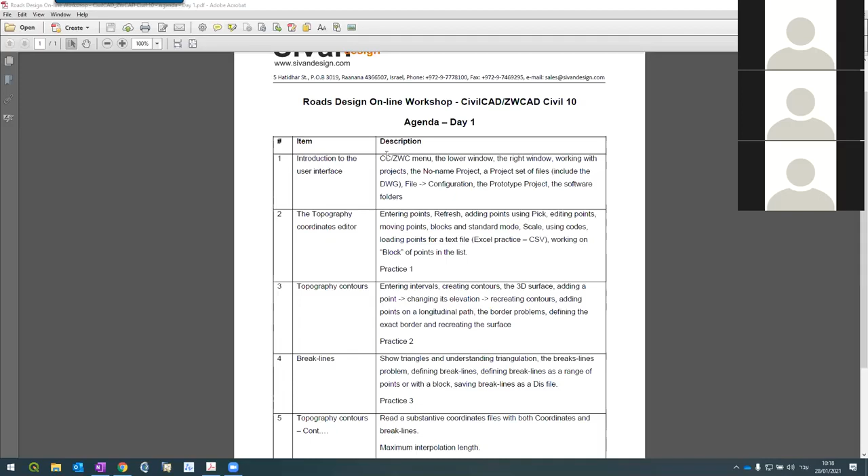We'll go to the topography coordinates editor - how do we enter coordinates, how do we load the coordinates, how we pick coordinates from the drawing and put them in the list, and vice versa. We'll go over how to use codes. I will explain later how to read from a text file, or in our case a CSV file, which is actually a text file from Excel. And then we'll see how to manipulate a list of points together as a block.

We'll go to topography contours. We create contours, we understand the concept of 3D surfaces. We'll add points, change elevation, recreate contours. Then we'll do a small study that will show you what we call the border problem and how to overcome it, how to define the border.

We'll end up this training with something we call filtering. Filtering is a method where you don't have a text file, you don't have data, you don't have breaklines, but maybe you have a DWG, a drawing file, and now you can extract the data from the DWG, convert your 3D surface, and continue working.

I hope I'm not too fast. I hope all of you can hear me. Just as a quick feedback, let's start with Gal. Gal, am I too fast or is it okay? It's okay.

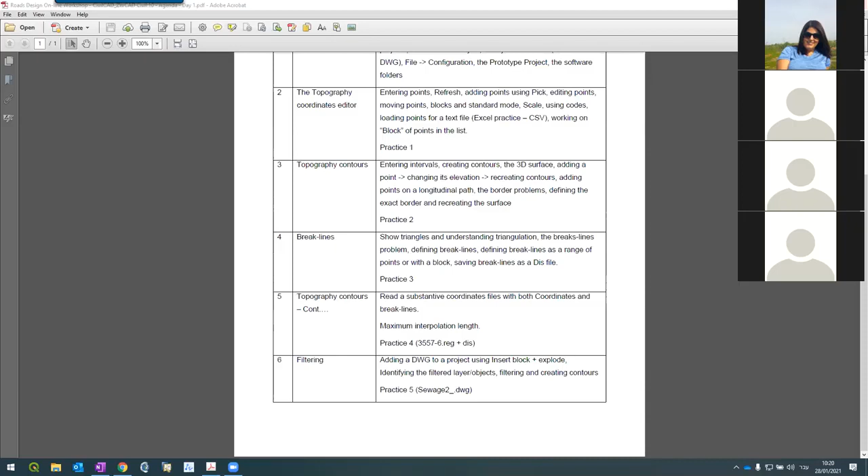Okay, let's not waste time and go into the system. The training is built up in a way where I do the introduction or demonstration on the software. Then, after doing that, I'll give you a practice to try it on your own.

So let me start. I'm starting the system. It launches, and immediately when it launches, it starts the drawing environment. I'm using ZWCAD.

What is ZWCAD? Well, I'm not here to sell ZWCAD, but ZWCAD is actually AutoCAD, a Chinese AutoCAD. So I'm using a Chinese AutoCAD named ZWCAD. In my opinion, it's equal or sometimes even better than AutoCAD. And believe me, I'm 20 years in this business.

But if you like, you can still use AutoCAD if you prefer. In my opinion, ZWCAD is faster and works exactly the same. So this is the advantage.

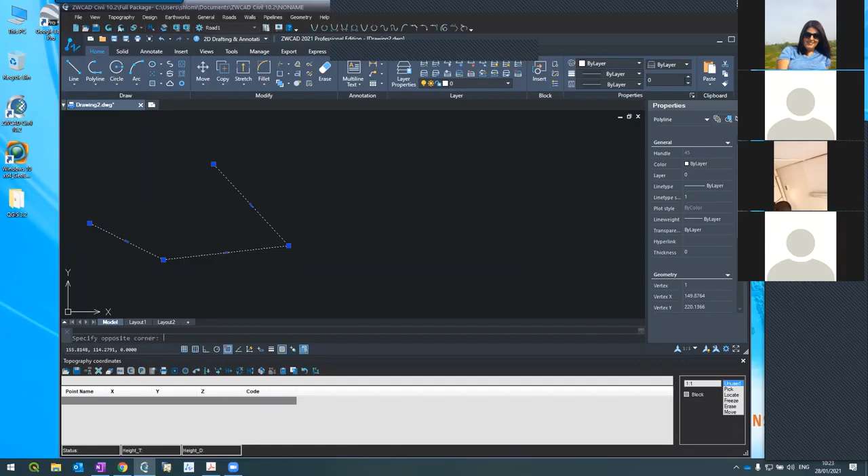You'll see the properties here. If you want to change color or layers, all the commands that you know from AutoCAD are here. All the buttons that you know, stretch, everything is here. All the menus, the ribbons - it's AutoCAD. It's actually AutoCAD. It's faster and most cost effective.

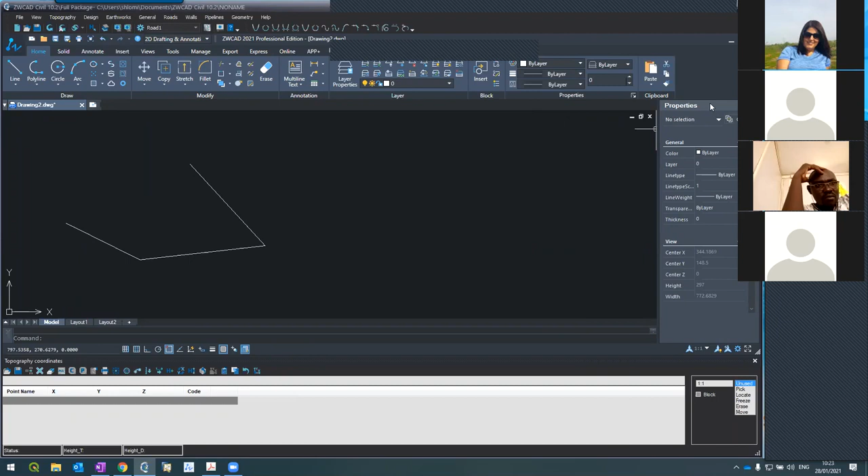So I'm introducing with ZWCAD, but you can work with AutoCAD. For me it's the same, whatever works for you. But I encourage you to work with ZWCAD.

Let me continue. This is the drawing environment. What we see here is on the top. I hope you can follow my arrow. On the top, we have the menu of ZWCAD Civil, which is actually CivilCAD. CivilCAD is ZWCAD Civil, it's the same product.

You see the menu of CivilCAD or ZWCAD Civil. Below, you see the toolbars of the CivilCAD or ZWCAD Civil. We'll learn about them.

And here is your standard ACAD, ZWCAD, AutoCAD - it's the standard. Here below, we have what we call the coordinates editor. It's an editor, I can type in things here. We will deal a lot today with this editor, but we'll talk about it in a minute.

So this is just an introduction. Very, very important - I'm working now on a project named No Name. You can see it on the caption on the top, it says the full path and it says No Name.

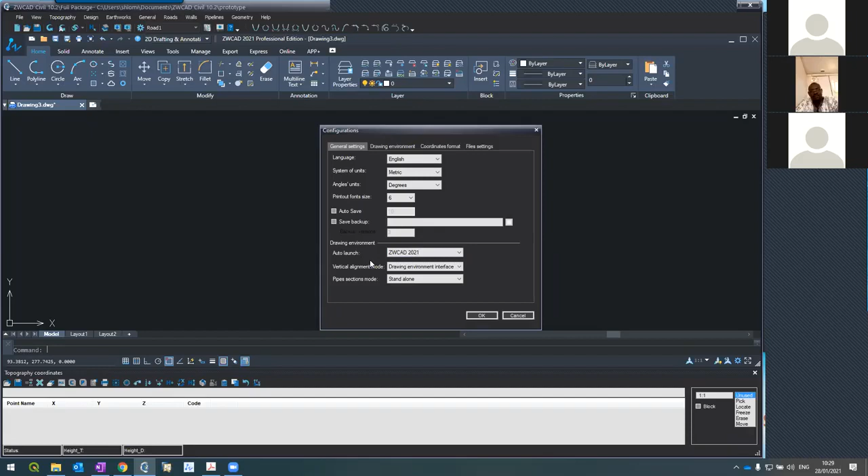If I go to file, configuration, file configuration, I can see how to set up certain configurations. For example, which drawing environment do I use - AutoCAD or ZWCAD. I'm using it here, I'm selecting. If I have several versions, I can use it here. I can go to drawing environment, set my default scale for the text. As you know, if you want to print at the scale of 1 to 250, you use one type of text size, and if you are printing at 1 to 500, for example, you use a different text height. So here is where you set it, the global scale.

Once you set it up in prototype, every new project will inherit these settings, but it will not affect past work that you have done - only new projects. So again, prototype affects new projects, which take their settings from prototype.

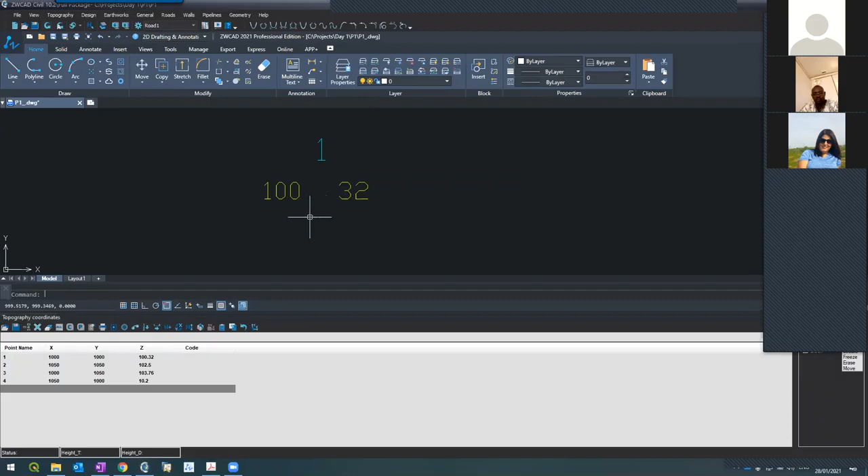Let's see what is the point. It's a block. Let me see - if I do a list, you see it's a block, inserted in a layer named civil.

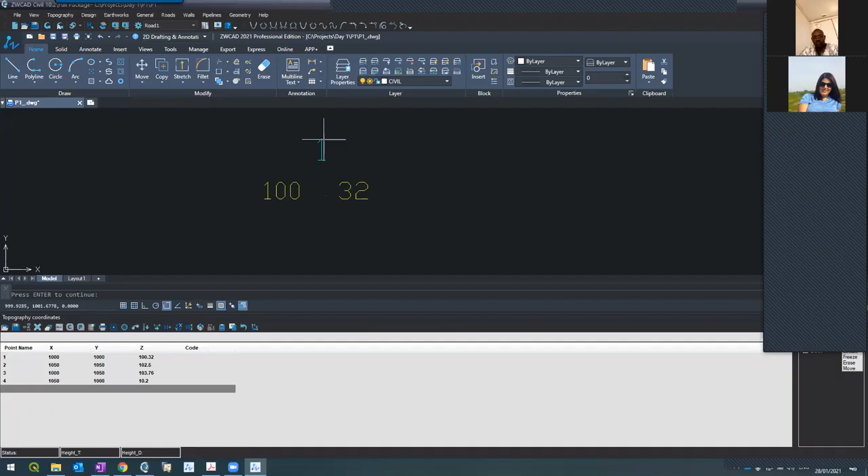The insertion point of the block is 1000, 1000 on elevation 100.32. So actually it's a 3D block where its insertion point is in the coordinate. Actually the insertion point is where the decimal point is, so it's this small one here. And the same goes here, and here, and points 3 and 2.

Fine, nice. How do I increase the size of the block? I don't know if you remember what we said, that our project should work with a scale of 1 to 250. So the software took 250 and created the block size with its attribute ready for 250.

But if I go here in the topography coordinates and press this button, option we call it, I see the options window where I can change and manipulate these things. Now I'm working on topography on the coordinates because I have many things there. On my coordinates, I want that my text will be adequate for a scale of not 250, but 500, and I would print.

Press OK and refresh again. You saw what happened? Immediately the size changed. Let me do it again.

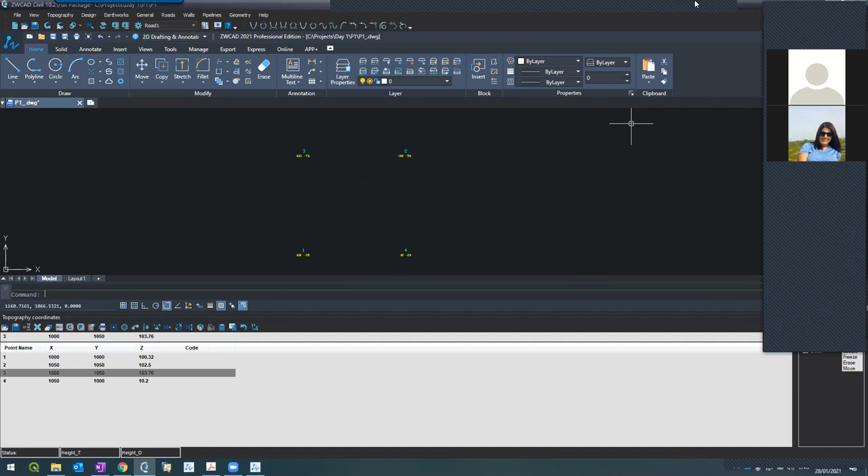What I will do now - you remember I entered coordinates here, pressed refresh, and it showed on the window. Now I'll do a different thing: I will use the pick here. See, I'm going down.

Everything below here in this window relates to topography coordinates. So if I go here to the pick and press here, see what happened in the command line - it says pick point, and gives it a number, 1005. I want to call it point number 100. So I'm entering 100 in the command line, and it changed to pick point 100. I'm going to the drawing.

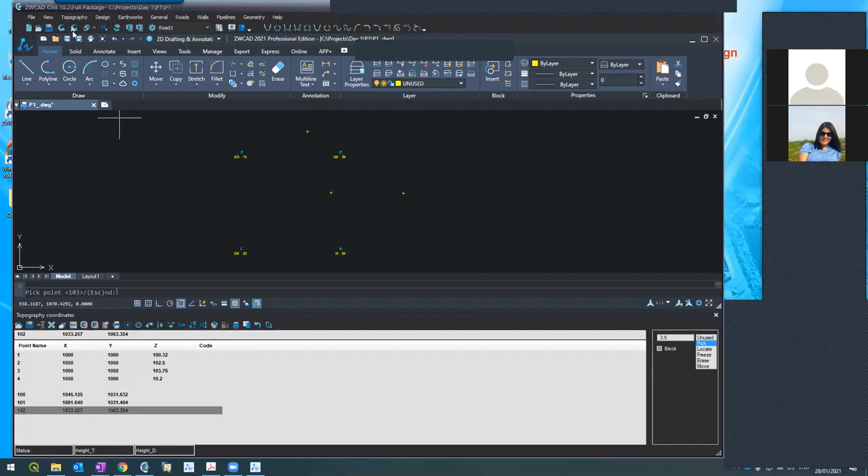And pick the point here. See what happened? It created the coordinates, giving it 100 and the coordinates. I'm putting one here and another one here. I'm pressing refresh. Here they are, the points, of course at zero elevation because we didn't give anything.

So again, pressing the pick here, it says in the command line, pick the next point. I'm clicking somewhere, it shows here. If I refresh, I'll see it completely.

I want to change the elevation of 103. I pick it here in the list, come to it in the editor, change it to 104, and press refresh. Here it is, 104. And so on, so forth.

Okay, so we saw how to do pick. We saw that there's a complete interaction between what's going on and the drawing.

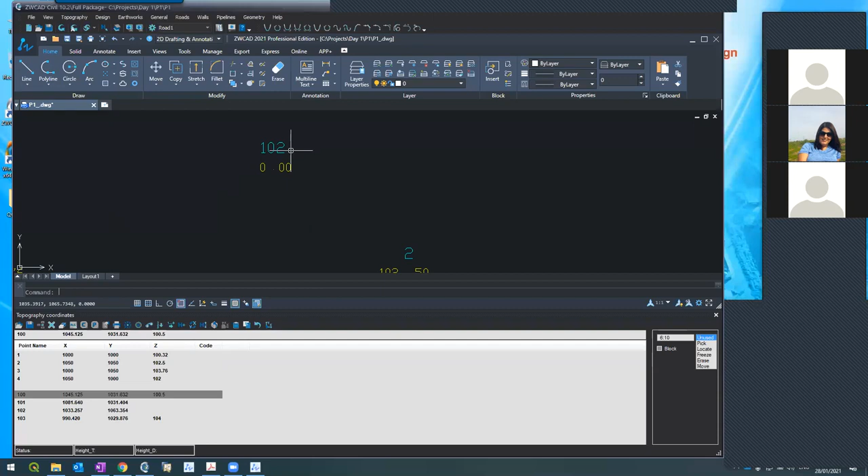But I can also add something else. For example, let's say that point number 3, when I pick it in the field, I've noticed that it's a tree. And in my GPS or total station, I collected it as point number - as a tree. I'm going to point number 3. You see the last column, it says code. I'm entering 60, pressing refresh.

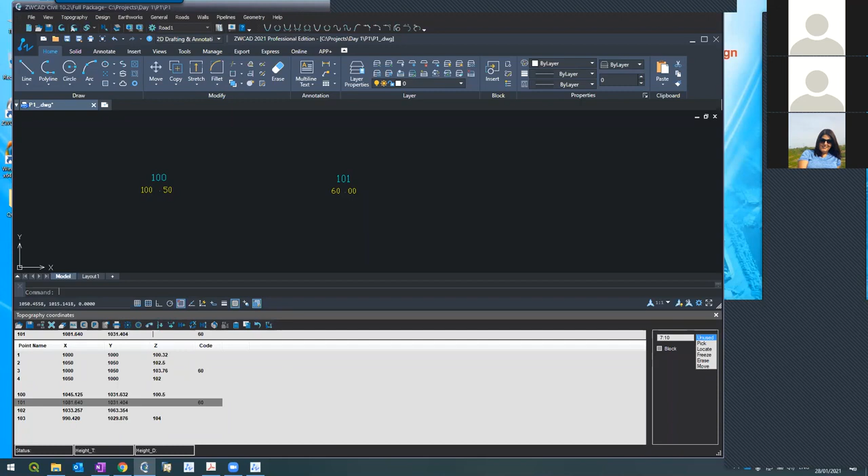And it becomes a tree. See? I entered 60 here, and it became a tree. Let's do the same for 101. I know that 101 is a tree as well. 60. Sorry, 60 is it. I need to give it a height. We did 0 and 60. Here it is, it's a tree.

I hope you got it. So how do I know these codes? How do I know these codes?

If I go to where my data is stored in documents, ZWCAD Civil, you'll see that there is a codes folder. And if I go to main DWG and open it with AutoCAD or ZWCAD, it's not so important. I started a new ZWCAD. Sorry, not this one, I made a mistake. If I go to main symbols, you see?

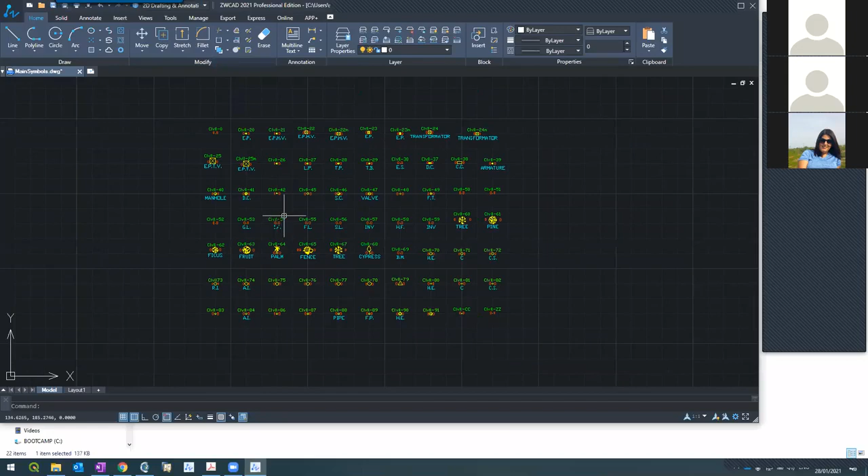Here we are, all these are my codes. So once I will 60, where was 60? Here it is, tree. I have pine, I have invert level. I have for valve, for example 47 is a valve.

Let's try it in my ZWCAD Civil, 47. I will take this point, 103, give it 47 in the code. All right, you see, it's a valve.

So here it is, these are the points, these are the codes. I hope you got it.

And what I'm going to do now is creating a file in CSV, load it in the system, and continue from there.

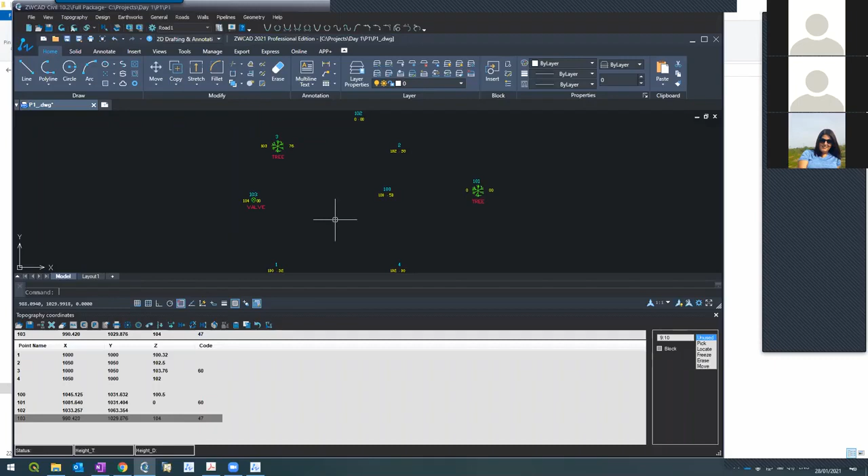So what I'm going to do now with all of you, I'm going to share with you a file which I prepared for this specific training. This one, this is the file. So this is the file, and what I want you to do is to, all of you, look at the file and practice it. So I'm putting it here. Here it is. Take now 10 minutes and practice the file.

Marina, do you remember how to, I don't know, even if it's possible, how to share with them? Can I share with them the file? Can I send it to them? Is it like Skype? Does it allow to... not sure. Share a file? Send them a file.

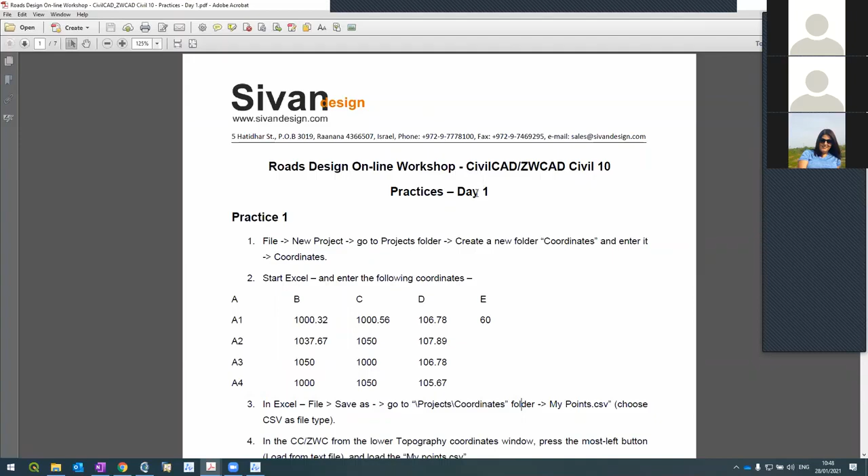I'm not sure, let me check just a second. You can attach it to the chat, Shlomi. I can attach it to the chat. Yes, yeah, okay, now you have the file. Thank you, now you have the file. You can download it to yourself. And I'm asking all of you to take 10 minutes and practice day number 1. Take your time, follow the instructions. If you have any questions, I'm here, just let me know. Take your time. Please, all of you, take the file, open it on your computer, open your system, and do it.

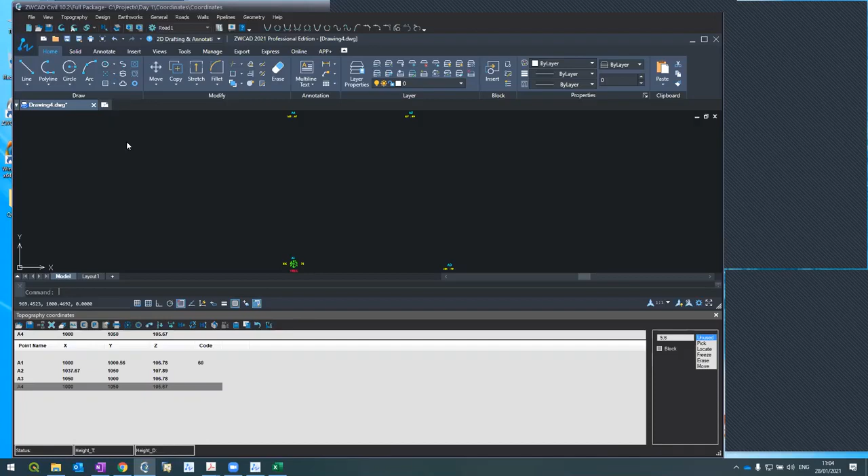Okay, I want to continue. So we created the points, we saw how to create, how to read from a CSV file, and we read it inside and saw it here. What I'm gonna do now, I'm gonna continue to topography contours. So all of you, please.

I'm going here, topography, contours. And on the right, I can see a new window, the topography contours window. I'm going to intervals and I key in 0.25, which is the vertical interval, and I press apply. Here it is.

With 4 points, the system creates contour lines between my 4 points. Moreover, the system creates a 3D surface between these 4 points.

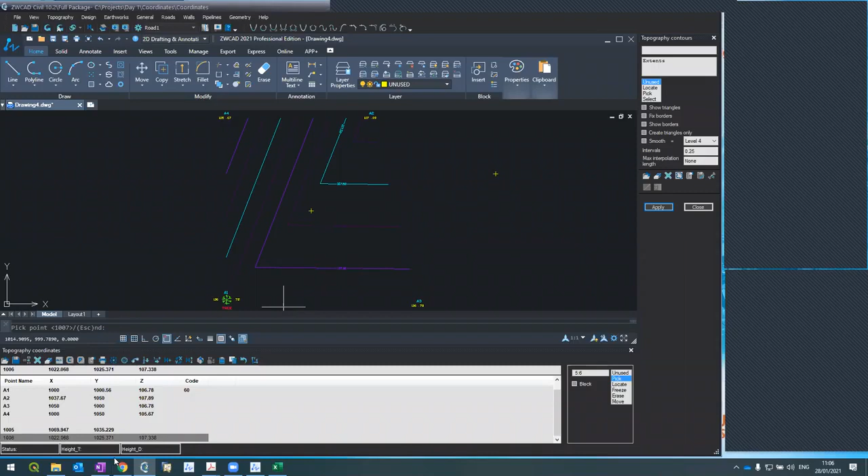That means that if I take my pick, which I used before - you remember when I picked a point outside of the surface, it gives me x, y. But if I now go inside the surface and pick anywhere, even here, automatically I'll get the z as well. See, x, y, z. You can try it. When I press refresh, here it is, 1006. Excellent.

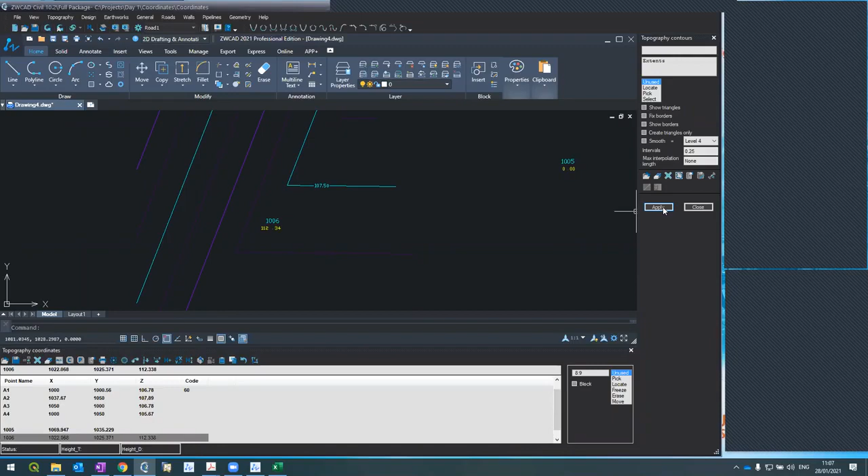If I take now 1006 and change its elevation, instead of what was existing, I will change it to 112. Press refresh and apply on the right side again. The contour line will change accordingly. I hope you succeeded to follow.

Again, I went to this point and changed its elevation. This is 1006, you see it here? And change its elevation to be 110.55. I'll refresh first, and then I apply again. You see, it's changed accordingly. And moreover, the surface changed accordingly. I hope you got it.

Any question to what I just did? Anyone, question? You can speak up, you can write. If not, I will continue.

Excuse me, Shlomi, just one question - how do you make the surface? How do you connect all this surface you make? Topography, contours - there's a window on the right. I entered the interval, 0.25 in my case. Press apply, that's it.

How do you put this window on the right hand side, the contours? The window on the right side. How do you open it, the contours? Topography, contours, in the main menu, you'll get the window on the right. You enter 0.25 or whatever you like, you press apply, and automatically you get the surface.

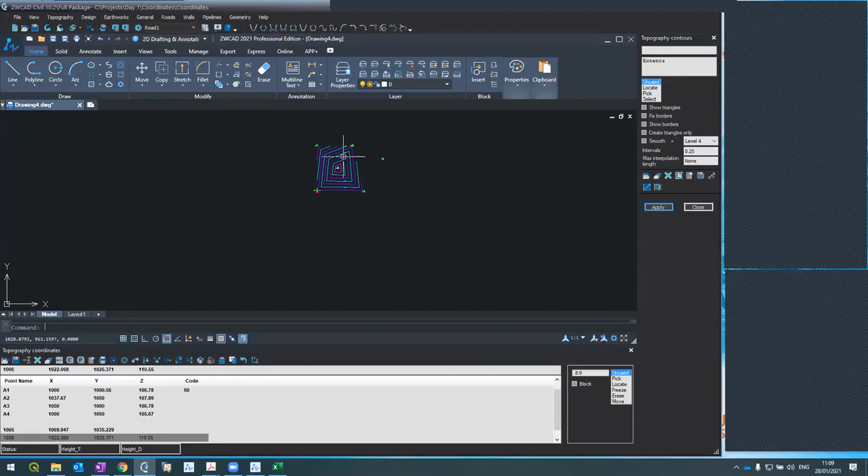Questions? Anything? Anyone? No questions. That's good. Now what I'll do, I'll create points here. How do I do it?

I'm using the pick. Let's assume that from here, from this surface, there is a small path going this way, and I'm having points along the way. The first point is here, the next one is here, and the next one here - this is one section. Next section is 1, 2, 3. Next section is 1, 2, 3. Next section is 1, 2, 3. And now refresh. These are my points. Good. I measured in sections.

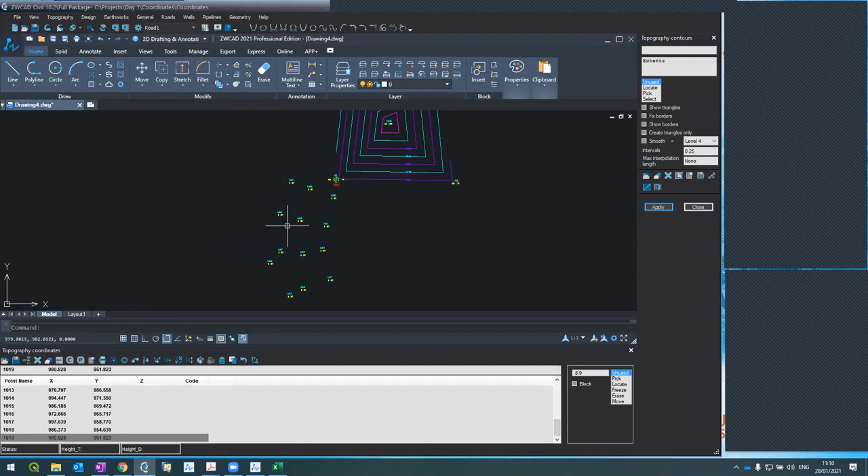Let's enter some elevations along. So for 1008, I want to find this one. How do I quickly find it in the list? I'm using locate here on the right side - locate, go to the drawing, pick the point. Automatically, the software highlights it in the list. And now I can enter the elevation. 1008 will be 107, 1009 will be 107.3, and 1010 will be 107 as well.

Let's continue. 1011 will be 107.3, and this one will be... sorry, I'll put it in - yeah, 107.3, and this will be 107.6, and this will be 107.3 as well.

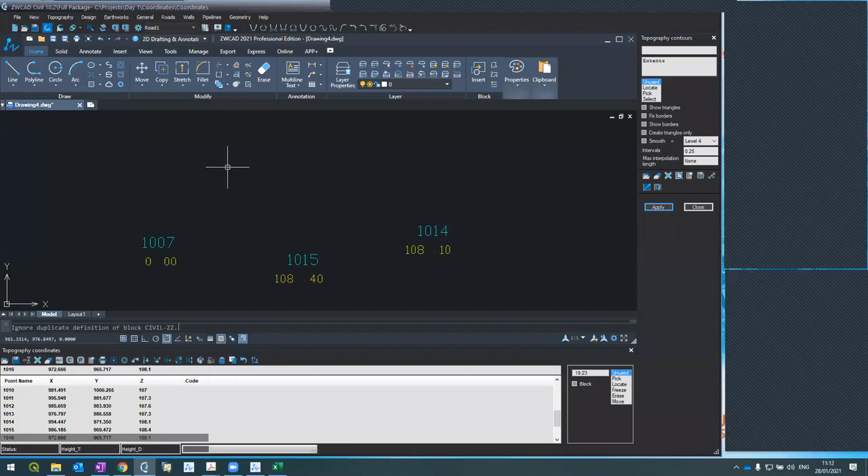And the last one, this one, I want to delete 1007. Let me look for it. Where is it? In the list, here it is. I'm clicking the eraser here, and refresh. It was removed. Let's continue.

To 17. It will be 109.5, 109.7, and 109.5 again. I'm refreshing.

Here are my points. I'm going to topography contours. On the window on the right, I press apply again, and then I have my contours.

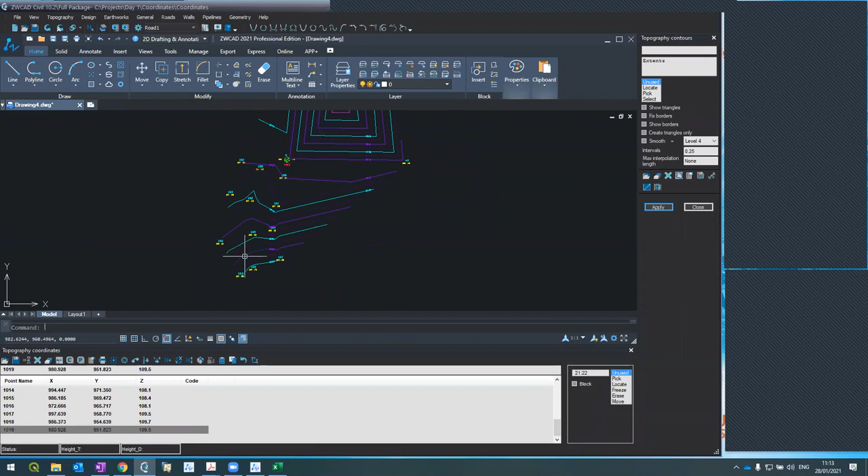See what happened: the contours were created, but the system didn't know that we don't want to create contours here. We didn't know that this is a path. It's actually supposed to stop here, but the system also created contours here. What do we do? How do we avoid it?

I will show you several ways. The first one will be to use the border.

In this topography contours window on the right, I'm clicking locate, and start marking my border. I'm starting from here, here, here. Every time I pick a point, it appears here on the right, and the system highlights it in the list.

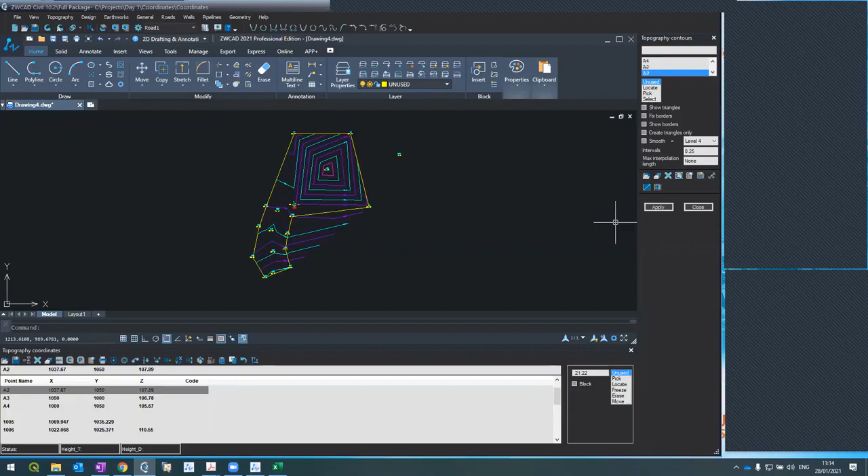When I want to finish, I press C in my command line for close, and enter. Then apply, and the system limits my contours into my polygon.

What I'm asking you to do now is the same practice that I did. You can do it in the document which I shared with you, named Practice 2. You can also look at the elevation which I entered here, so you know which elevation to enter and have reasonable data. It's not so important, but still.

Take 10 minutes, exactly 10 minutes, so we'll pick up with more information today. At this point, like I did, pick and enter the elevation for this point. If you don't remember, you can use Practice 2 in the document I sent you. Take 10 minutes please, if you have any questions I'm here.

Gal, is your machine working now? Yes. Okay good, yes thank you. Yeah, please continue with us. If you have questions let me know, if not just practice what I've done. I did.

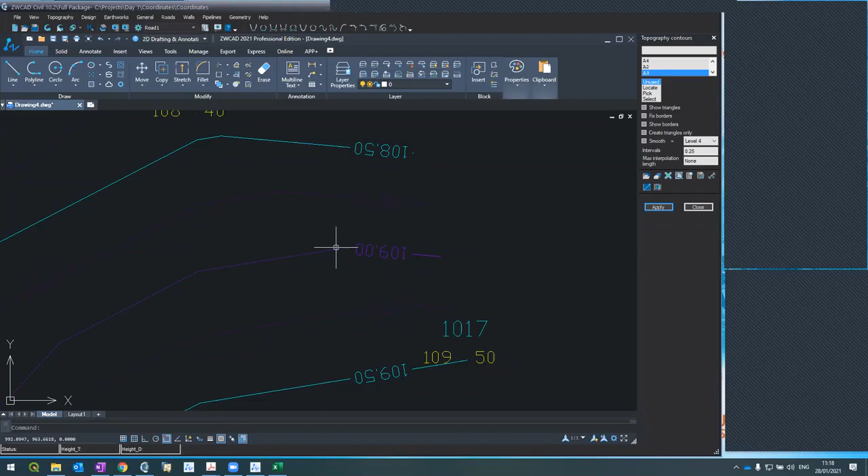Each 25 is in dark blue, like this one - we can hardly see it. Each 1 meter is in a different blue. So these are the colors - the system creates colors to differentiate the elevation.

Of course this is a small example, but you can see it here: this is 1 meter, 1 meter, 25, 25, and 50.

It's in layers, so if you go to the layers in ZWCAD you'll see. Where is it? Here it is. The system creates a few layers: TCONTOURS0, 1, 2, and 3.

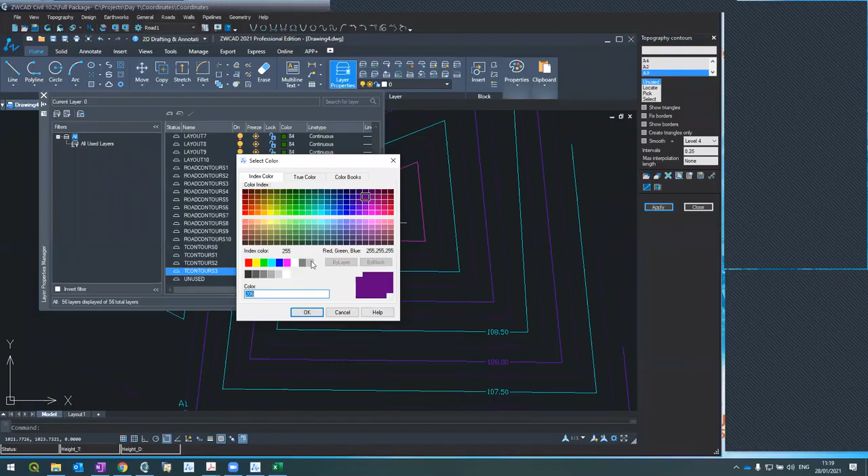For example, if I want to change this, the 0.25 to be seen better, put it here. Okay, maybe now it's better. By the way, I can change this color in the prototype - if I open prototype in the DWG, named prototype, change it, then every new layer will get its color from the prototype.

Any new project, sorry. More questions?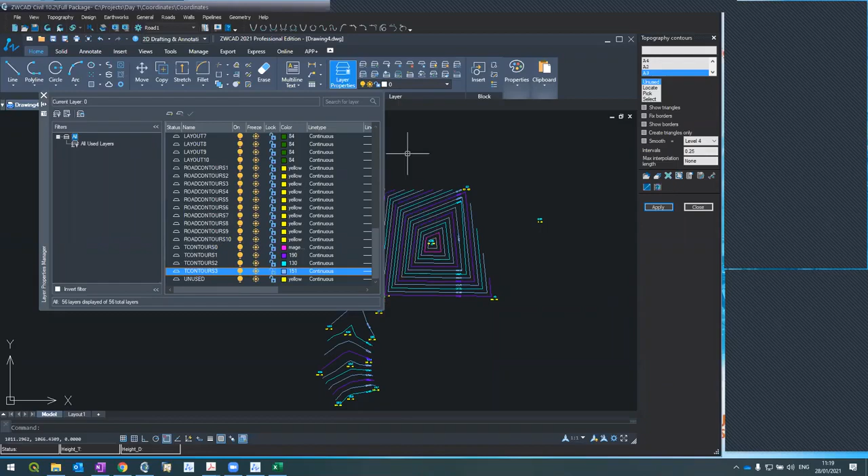Did you succeed to create this small path which I created here? Did you succeed to create the borders? Mr. Majid, are you still around? Because you said you are going. Majid left us. Dareen?

Where is the point? I could not locate it. What do you mean? I couldn't understand exactly. When I make a path - yes - I put locate, right, so I locate most of the points. Then when I arrive to a point, it doesn't click.

I don't know why. Can you share your screen so we try to see together? Maybe I don't know how. I will allow you - allow. No, I think you can. Share screen, make host, okay.

Try to share your screen now. Oh, share screen, yeah, no it was not - it was disabled, I allowed it to you. Yeah yeah, okay okay, do you see my screen? Yes, yeah.

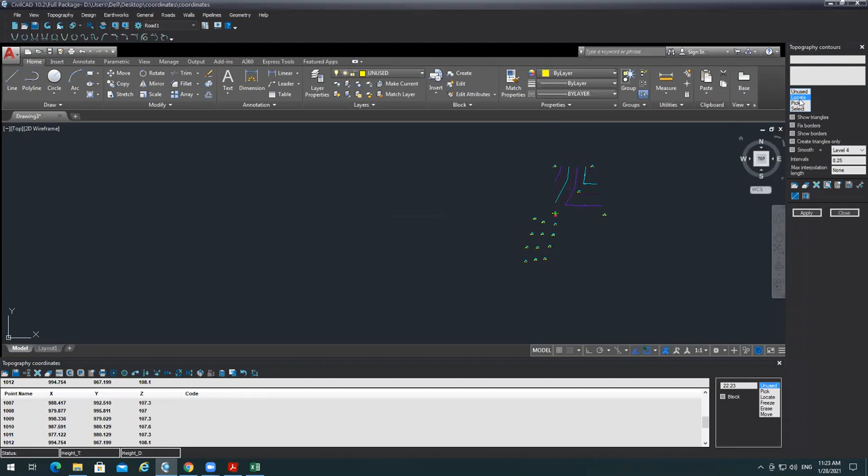Let's see if it goes now. Locate. It's the same problem at the same point. Yeah, very, very strange.

This is the first time I'm seeing something like that. I get the idea, but I don't know why. Yeah, no, I understand. Try to grab 1013.

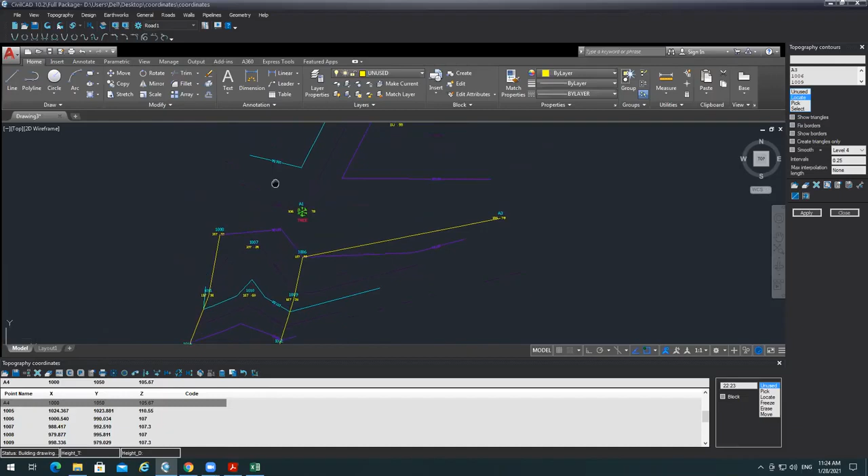Very, very strange. Okay, I'll continue with that. But no, you cannot pick a tree block. Okay, oh okay, stop sharing. Okay, no.

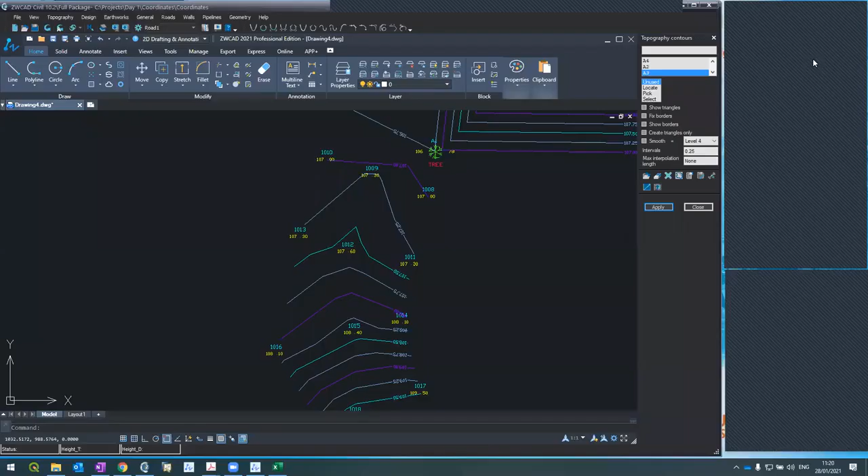How is it going for the rest of you? It's going well. Going well. Good, going well.

So you succeeded to do it? Nobody encountered the same problem, we cannot pick a specific point? No, none, no. Okay.

Doreen, when you did it, did you try by any chance to move a point with Move in AutoCAD? No, I didn't move anything. I just pick and put the Z coordinate and I locate.

The only reason for the software not to do that is if the drawing and the list are not in the exact location. So what we usually do in this situation is go to the list itself, hit a space or anything just to let the system know that we have done a change, and then we refresh, and the system aligns the points with the drawing.

This is the only way, I'm thinking what can happen, but anyhow this is the only thing I can think of right now. Okay, so the rest of you, you have done your borders, so you saw how to fix the borders. Fine, this is very good.

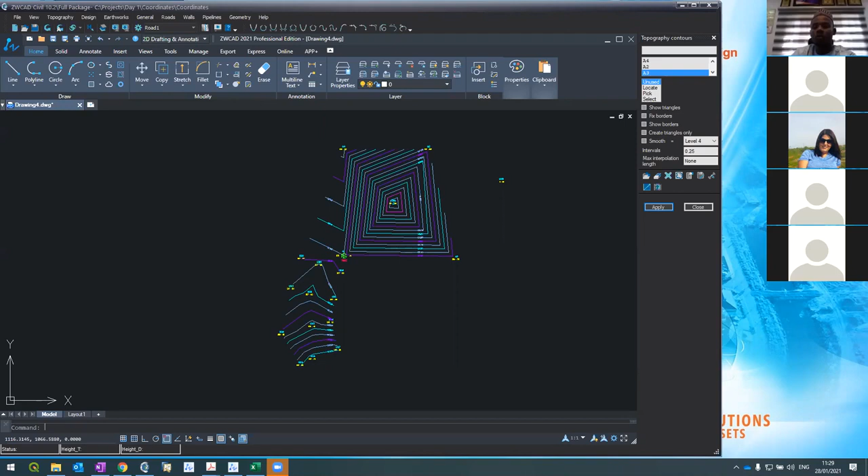A break line means it's a geometry problem, but the geometry problem affects what's going on in the field. We use break line to create a break in the interpolation. Now, before I explain further, let me show you something.

I'm asking all of you, in the topography contours window on the right, click show triangles. You see it here? Then press apply. See what happened, we see the triangles that the system created for the interpolation.

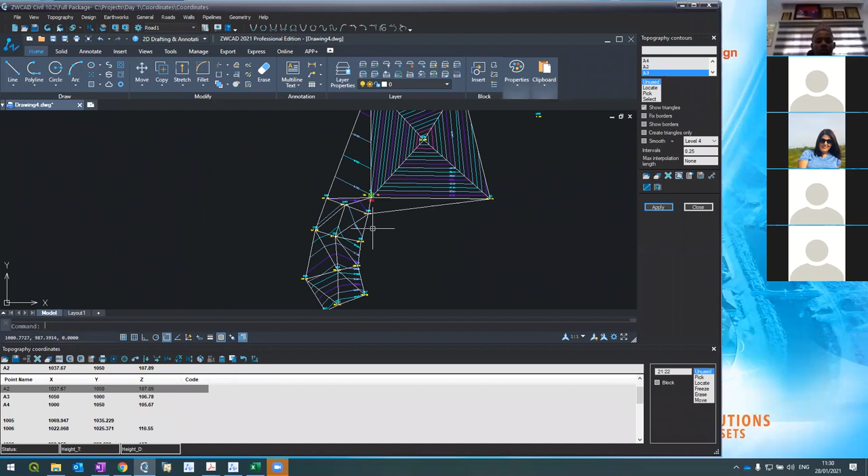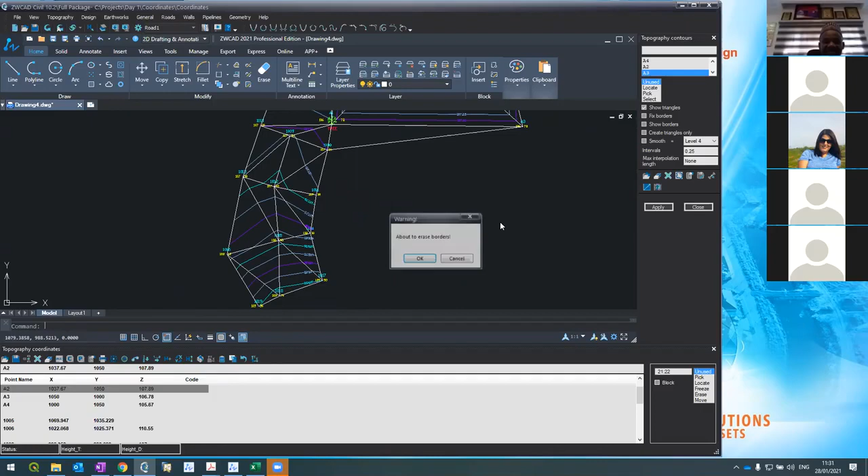By the way, let me remove my border and press apply. This was the problem. The system created a triangle from here to here and from here to here, because the system didn't know that in practice we want to stop the triangles here. So we have to manually tell the system, go along, and change the triangles.

Fine. Now I want to talk about a problem. Let me remove the triangles. I named this problem, I called it the break lines.

Now, this is the edge of my path. You want to call it a road, a path, or whatever you want to call it. You see this point here, they mark the end of my path. Let's assume from the end of this path here, there's a small cliff going along here. I hope you got it.

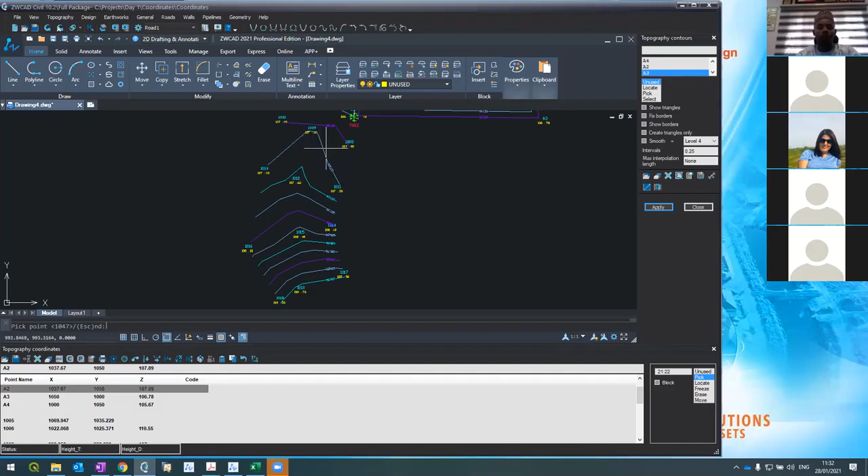What I can do is use the pick and picking points. Let's assume that I surveyed the top of the cliff. So I surveyed 1 point here, 1 point here along the cliff, 1 point here, 1 point here. I went along the top of the cliff and surveyed it, and here, this is the top of the cliff. I refresh it.

And on the top of the cliff, for each point, let's enter the elevation: here is 107, 108, 109. I will choose 112. 112 here, 112. Now I want to show you a trick.

Instead of going point by point, I can mark 1050, hold shift on my keyboard, and mark the last one, 1052. I marked 1050 and by shift I mark the entire list. Then I click block here. There's a block here I marked. What happened now is I captured all these points together as a block.

It means if I go to the elevation anywhere and give it an elevation, let's say 112.5, it affects the entire rows in the block. I press refresh and I've done it. So I have all the points here, here, here.

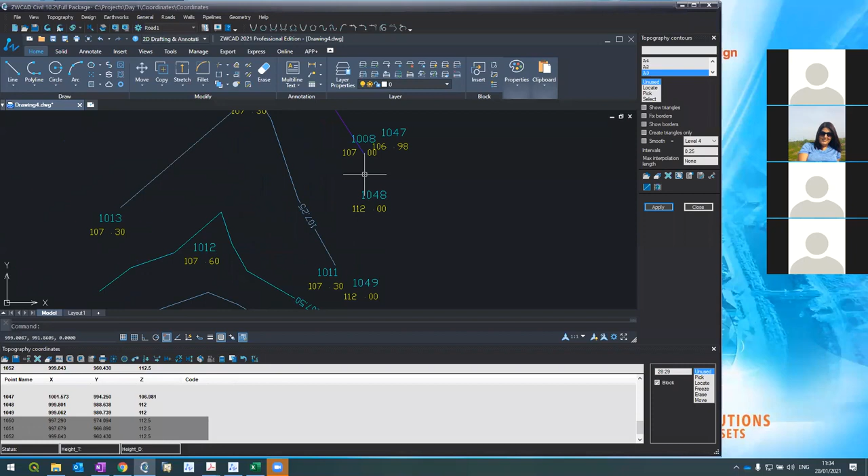And now I'll tell the software, let me remove the borders because I expanded the border. So the software can, and apply. See what happened now, the system does the interpolation. Oh, see what happened.

Let's ignore this side for a minute because this is the border. Let me reselect the borders. Here, here, here, here, here, here, here, here, here, here, here, here, here, here, and close and apply.

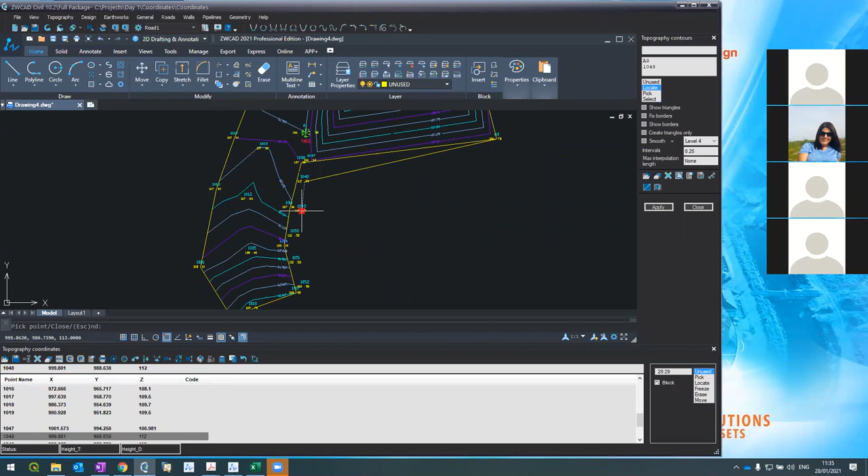Yeah, so this is my new border. Ah, I didn't pick the right one, sorry. Again. Okay, this one, this, okay. This time around I will pick this one.

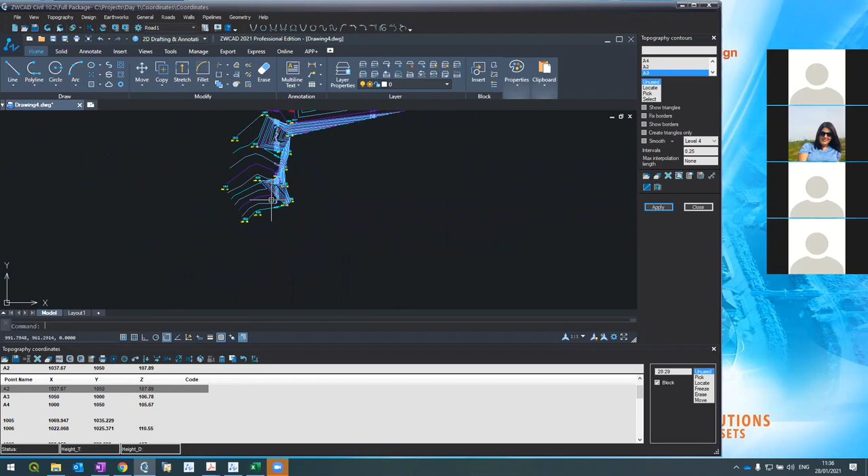Right, and this is the problem. You see what happened here? This is okay, this is the cliff. But see what happened here. The question is, why did the software create something like this? Where I would expect that these contour lines would be all along, showing the cliff all along. I hope you got it.

The problem is what we call a break line. If I'm telling the software to show triangles, see what happened.

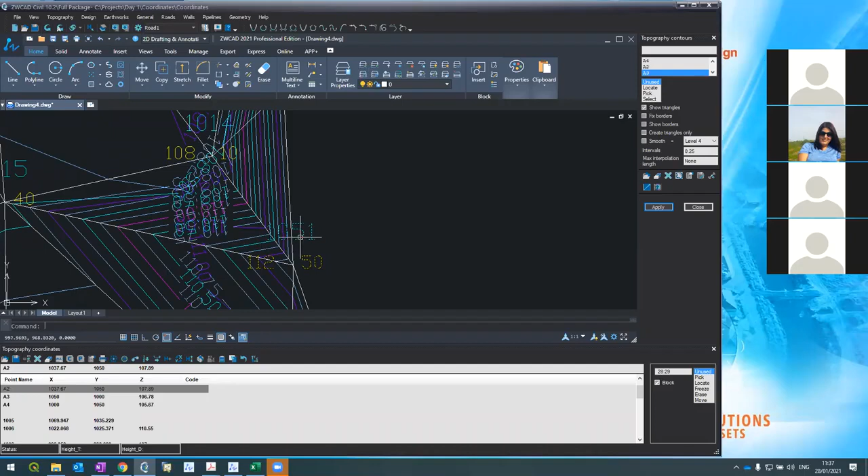It interpolates directly to 108, but we don't want it to interpolate. Actually, we want it to break here, along here somewhere. Let me do a schematic thing. We don't want it to interpolate more than this. We want it to stop because we know this is the side, but the software doesn't know that, it doesn't know to stop here.

So immediately it's interpolated to the nearest point. How do we solve it? We call this problem the break line problem. How do we solve it?

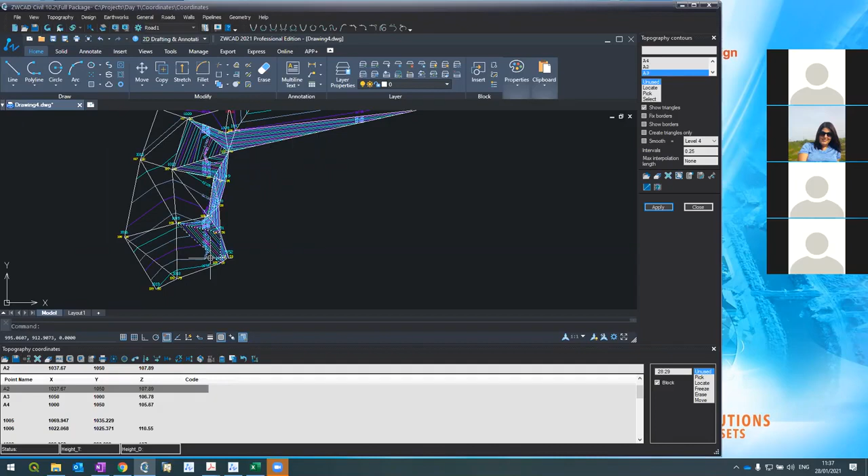I'm going to topography, lines. And on the right, I see a window. The window consists of two parts, upper part and lower part. The upper part describes each line. Here we have the lines list, so we have only one which is empty, line number 1, which is empty. And on top I have all the coordinates that assemble line number 1.

So if I click line number 1 and start defining it, I'm using the same locate trick which I used before. My first break line will be here along the end of my road, from here to here. You see on the right, see what happened. See the list of points which I picked, the same like we did on the border.

And from here to here, and here to here, I'm going along the end of my road. I can do the same to the end of the cliff, but it's not so important because the contours end up here, so it's not so important.

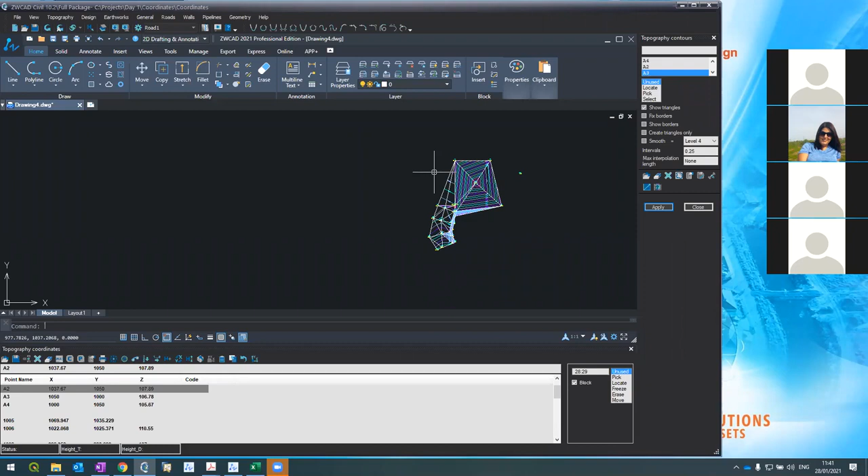I want you to have a look, practice it by yourself. For this, what you need to do is practice number 3. So I'm asking all of you, go and do practice number 3. If you have any question, I'm here to help. But it's important, it's essential that you understand the concept of break lines. So please go ahead.

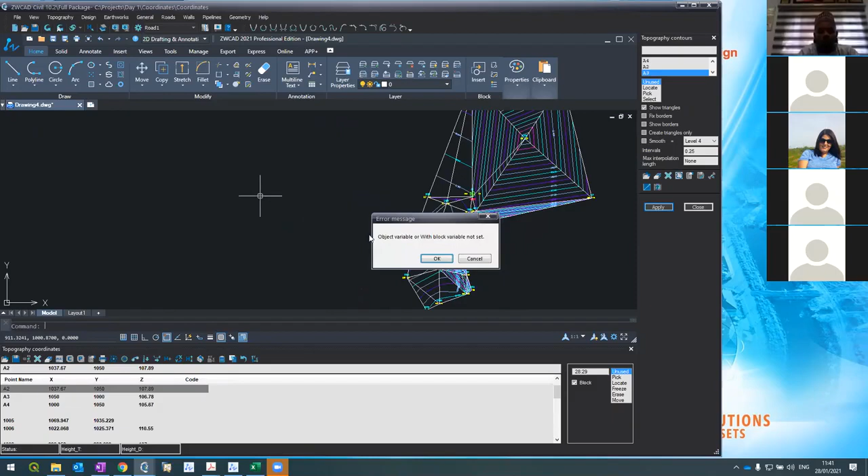If you have a question, let me know.

Hello, good morning. Good morning. Who's talking, please? My name is Mohammed Abba from Maiduguri, Borno State. So please, can you give me access to record the session if possible, today? Access to... I mean, I want to record the session if possible, can you give me access? No, we are not recording. We are recording ourselves, and then we will distribute to all of you. You will have a recorded version at the end. All right, thank you.

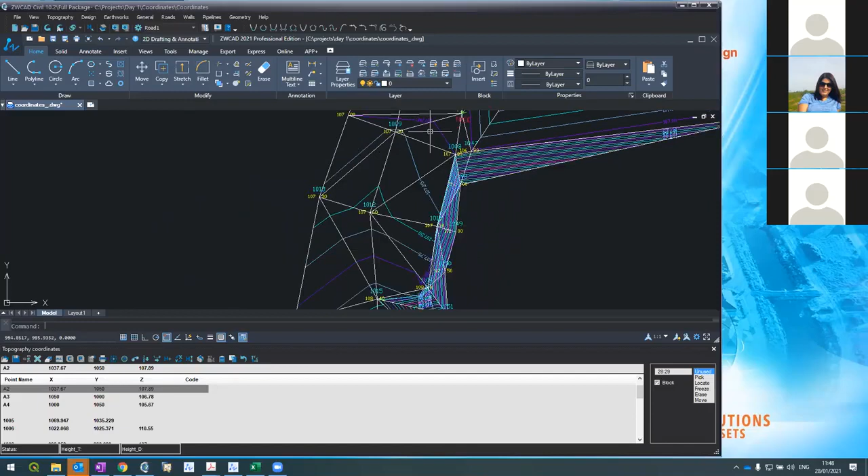Yeah, completely. When I press locate, then I press escape, it doesn't escape. It highlighted locate, and I couldn't escape, and I couldn't locate a border. I want to ask, are you using the same version which we distributed specifically for this course? Yeah, ZWCAD Civil 10. But ZWCAD Civil 10 has different versions, which release? We sent an email yesterday to uninstall and install the version. Yeah, I have 10.2, but 10.2 also has different releases. Did you do the uninstall and install according to the email from yesterday?

Specifically, it was designated for this training, so please use it. Just follow the instruction over there. You can do it for the next training, it's not important now. Good, just continue. Follow the instruction next time and just uninstall and install the version which we created specifically for the training. Very important. Okay, thank you, thank you.

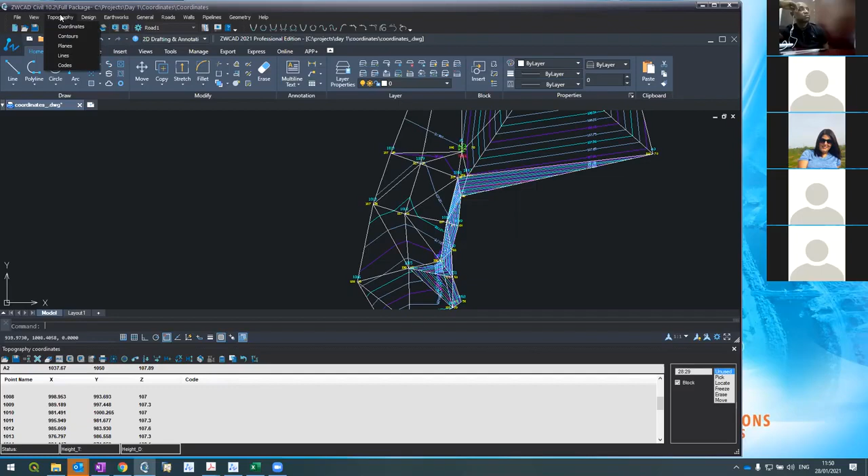Nothing. Okay, now for a break line, once we use it, if I go to the topography lines, I can

save the break line as a separate file. If I press save here, I press save as this file, it creates what we call this file. This file is a file of break lines. So again, on the right side, I click save, I saved as this file, and I call it

coordinates. You know what, I will call it break lines. Okay, I have this file. In this case, I can use this file in another project if I want. So for this example, what I'll do now, I will open a new project, and this will be the last session that we are doing.

Sorry, we have 2 more sessions in our training. Do you need a break? Guys, do you need a break? Guys, anyone? Yes, yes, yes. Are you okay? Yes, we need a break. Who is talking? Muhammad is talking. Oh, Muhammad Abba, okay, you need a break. But please don't go far. We are taking 10 minutes break, exactly 10 minutes, and at 12 o'clock we are starting. We have an additional 20 minutes and we finish. Okay, and we'll finish, so please, 10 minutes. Thank you, thanks guys, I'm leaving it open here. In 10 minutes we continue. Thank you, thanks.

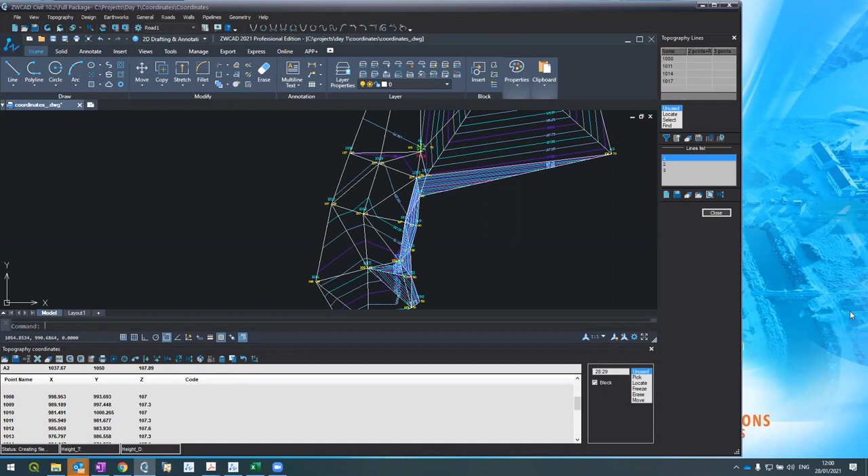Mr. Muhammad Abba, can you hear me? Mr. Muhammad Abba, are you here? Yeah, I'm here. Okay, did you succeed to follow the training? Yeah. Okay, good, thanks. And Mr. Hakim, what about you? Mr. Hakim? Nothing for Mr. Hakim. Mr. Hakim is not here, he was here a minute ago. Adams? Mr. or Mrs. Adams? Do you follow? Yes, I'm here. Okay, thank you, thank you very much.

May I continue, please? Yeah, so let's start. I'm starting a new project. File, new project. And I'm calling this project

P2. And in P2, I'll give it a name, project P2. Now, here in P2, I'm going down, and you remember before we read a CSV file. This time I read another file, very similar, named .reg. I'm going down, pressing the lower left button, go to Documents, ZWCAD Civil,

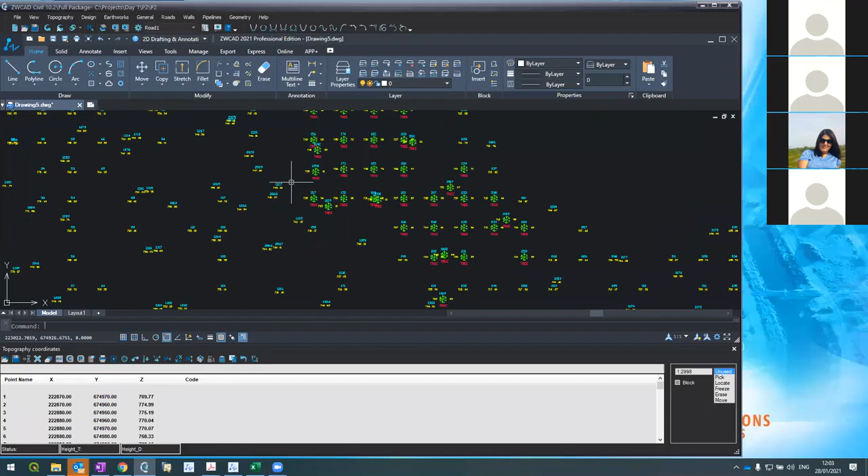Samples. Here I can see 35576.reg. I open it. This is the list. Press refresh and wait. Here it is, these are the points. Now I'm going to topography lines.

And this time around, I'm reading a pre-ready file. So I'm using the load here, again, and reading 35576, read file. I press yes. Here it is, I can see the list of points, the break lines.

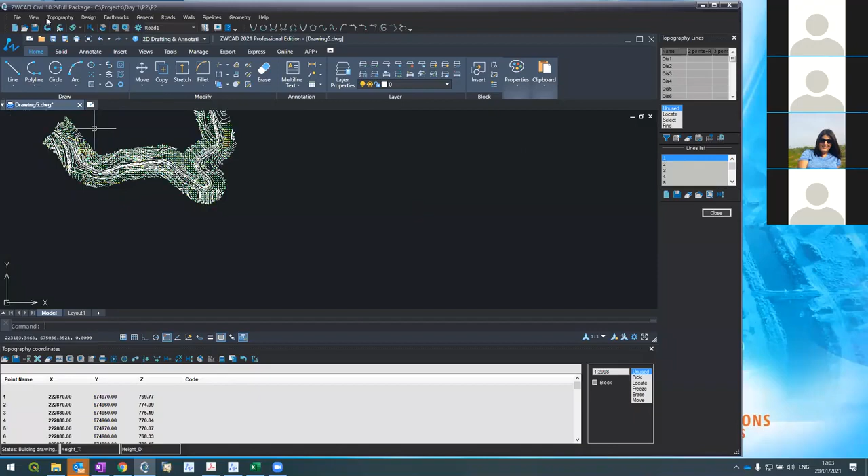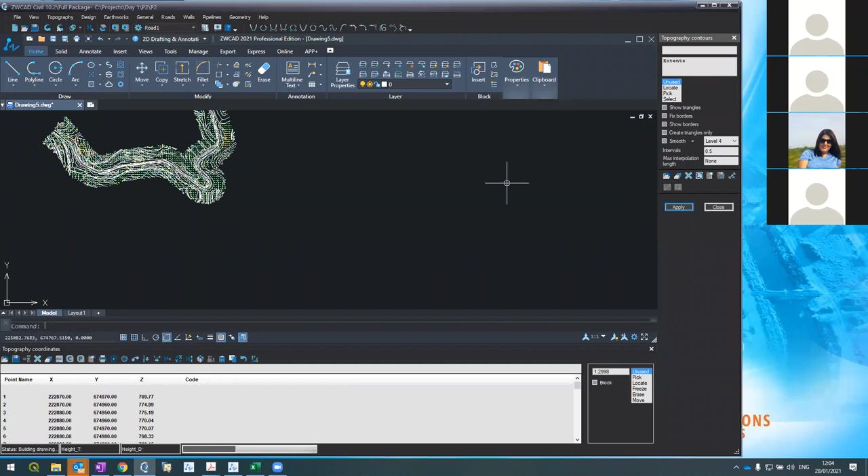Now, if I go and create topography contours, let's say 0.5, press apply. See what happened, the system created the contour lines, you see exactly with the break lines and everything. But the main problem, also like we had before, it creates long triangles here. If I do show triangles, the same problem that we encountered formerly, but in a much wider area, is now repeating itself here.

It now repeats itself here.

So what we get, you see, this long interpolation here and here, which don't really exist.

Now, of course, we can use the same method of doing locate all around, but there are hundreds of points surrounding this place, so I have a better method.

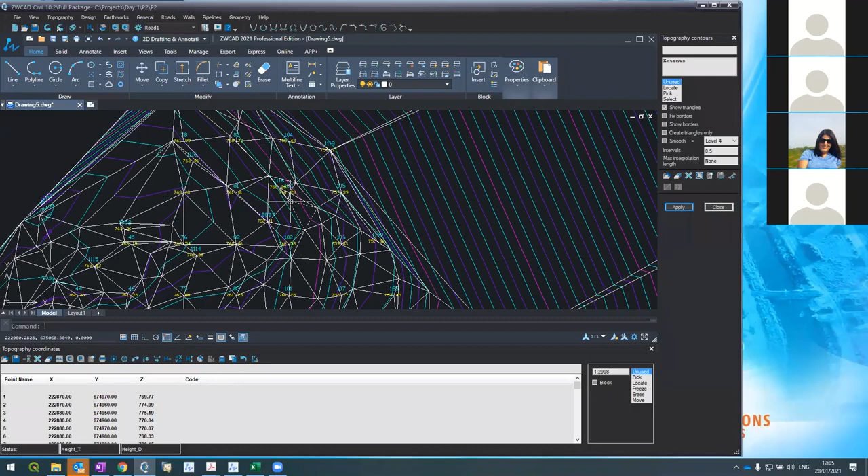What I can see is that the points here are surveyed. I don't know if it was surveyed GPS, remote sensing, orthophoto, whatever, but it's not so important. What is common to this interpolation is the distance. You see, the distance between here and here is very far.

In fact, what I'm telling the system is this: each point which has a distance more than a certain distance, don't interpolate. It means, for example, I will say 60 or 70 in this case. That means if the distance between this point and this point is more than 70, the system will remove the triangle. Let's see what happens.

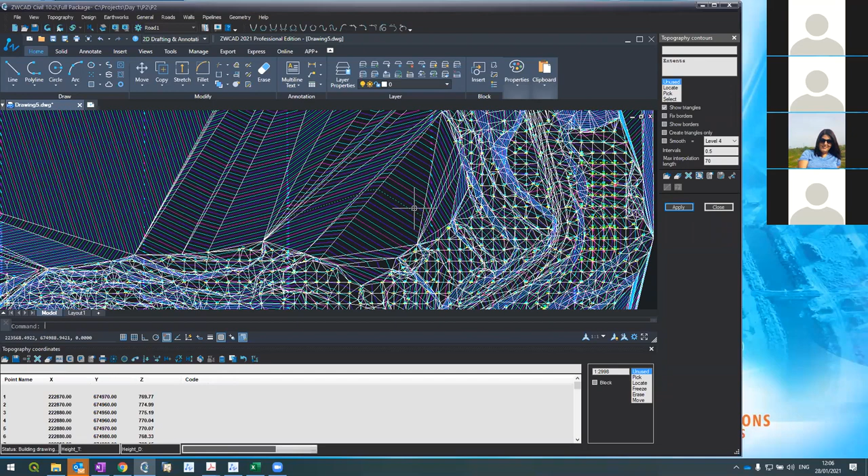And I will apply. You see? This eliminated all the problem, all the triangles which were very far, were removed.

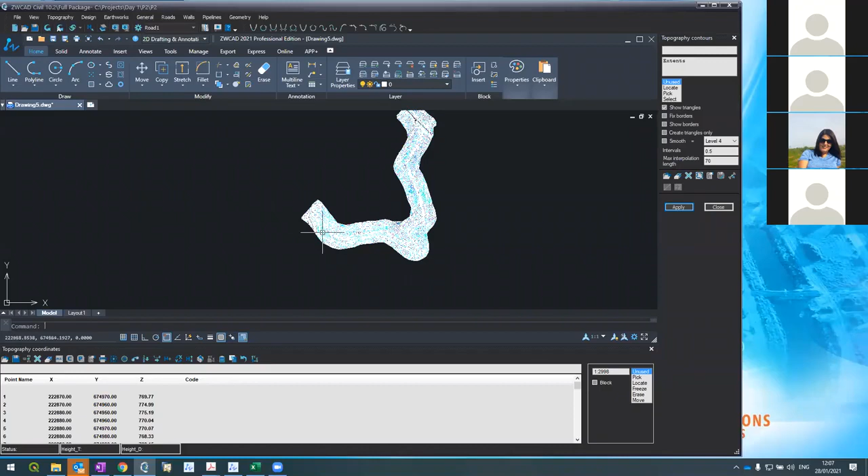Okay, so we learned just now another method of how to fix the borders. Before we did with locate, and this time around we used maximum interpolation length. What I want you all to practice quickly, use practice 4 on your practice document. Do practice 4, do the same thing that I did so we can continue. Please, I'm waiting. Take 10 minutes.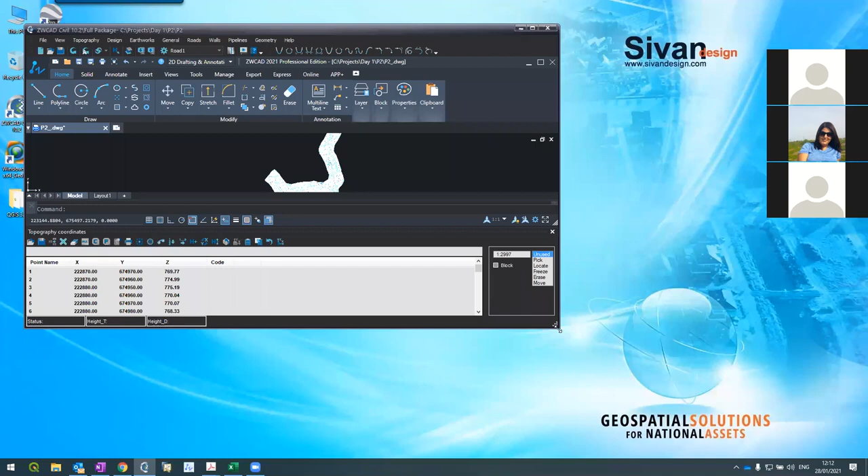Let me share my screen. Okay. This is project. I'm going to File, New Project, and call this project P3.

Listen carefully. The problem is like this. I only have a drawing file, I have a DWG. But I don't have no coordinates, no contours, nothing. And I want to extract the points from this DWG.

I want to create surface and continue my design, my whatever. I started a new project, P3. Then I'm entering in AutoCAD, I'm doing insert. I'm selecting the DWG file which I want to use. This is the file.

And I tell the software insertion point 0,0,0, scale 1. I'm not touching this, and I want to explode it. I'm marking to explode and insert. Zoom to extend. This is the drawing.

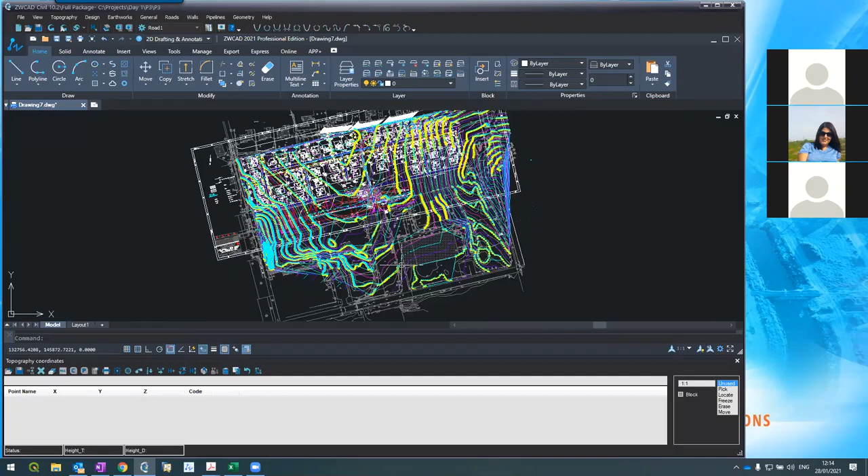This is the drawing where I have points. You see the gray, these are points. But I have only DWG. Now I know that to create a 3D surface, I need points here in the list. This is something that I know, right?

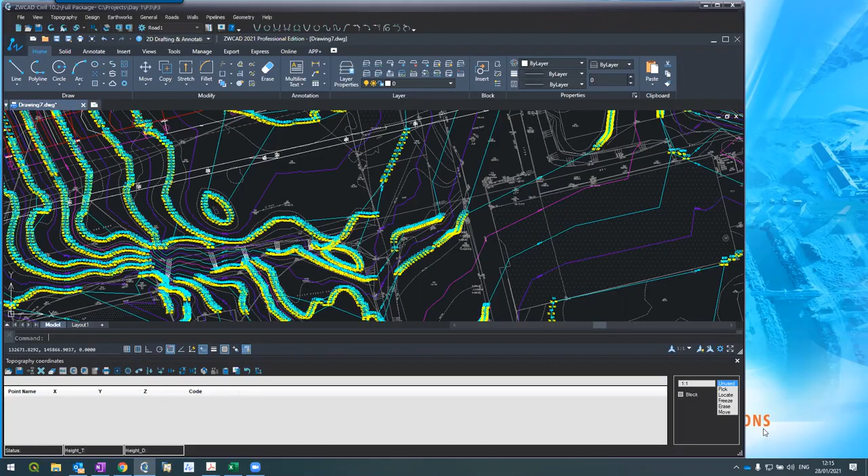All over, okay, let me do the entire thing all over. The problem, I know that I want to create a 3D surface, one which later on I create section, I can pick heights along it, I can calculate volume or whatever. For this, but I don't have the topography coordinates.

Someone had surveyed it, and I only have the DWG, the drawing. How do I use it? I'm starting my ZWCAD or my ZWCAD Civil or my CivilCAD, whichever.

And here, what I'm doing is starting a new project. File, new project. File, new project, and I will call it, for our case, a filter. This is the project, and a regular project. Now, usually if I have coordinates, I can have them typed, I have them from Excel, I have a TXT file, I have a reg file, CSV, but I don't have.

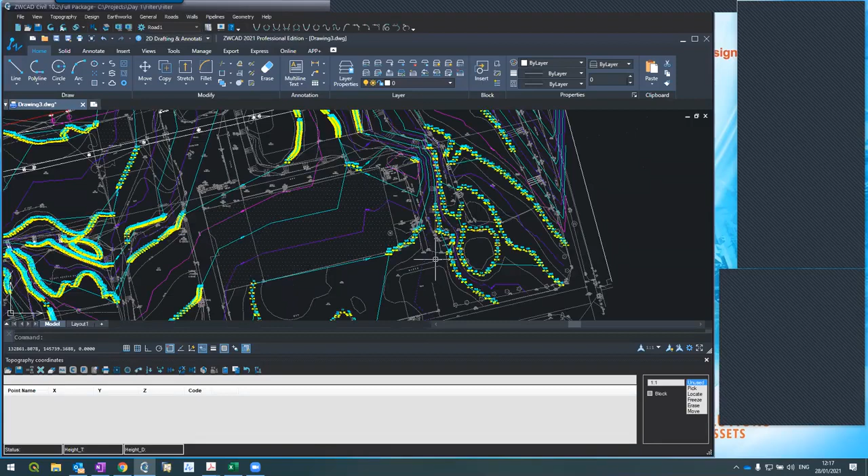Let's look at finish. Okay, here it is, it's a DWG. If I look deep in the DWG, I see that there is a layer with some points here. You see these elevations, here I see some elevation, here I see elevations, here I see elevations. I have a lot of elevations along the road.

What I'm gonna do now, I will use this layer to filter or to extract the points here in the DWG. How do I do it? First of all, let's see what it is. I'm clicking on it and doing a list. I see it sits in a layer named MED, and it's a block entity insert, and it's with a Z value, 55.6. Fine.

Then I'm going to general filtering. I get the filtering window on the right. General filtering.

And I get the window on the right. Now it gives me the list of layers and the list of entities. I know it sits in MED and it's a block. I can either pick it from the list or use select, go and pick one object and press enter, and automatically it finds that it's in MED and it's an insertion, a block. The system did it for me instead of me picking.

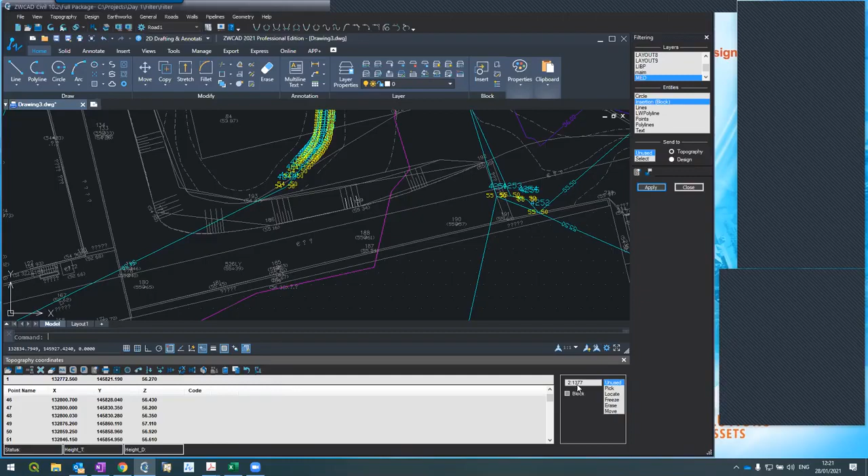Here it is. This is the list of points which were created. Actually, I see that 1,377 points were filtered. I can see it here. I'm pressing refresh. And that's it. Now it's a regular list of points. I can use it regularly. You see all the points here.

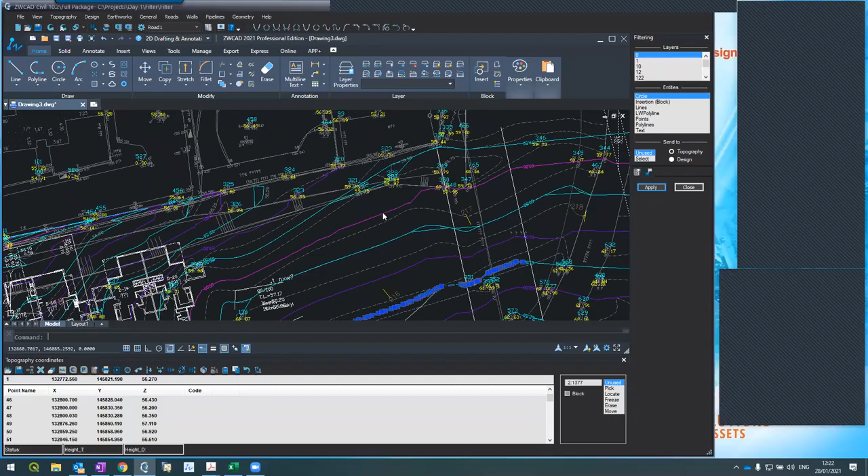You can see it - everywhere there was a MED block, the system recreated and created its own block with its own point. Now I can continue regularly.

Topography, contours, 0.25, for example, and apply. The system will create contours. System creating contours, let's see. Okay, there are contours. Oh, but see what happened here.

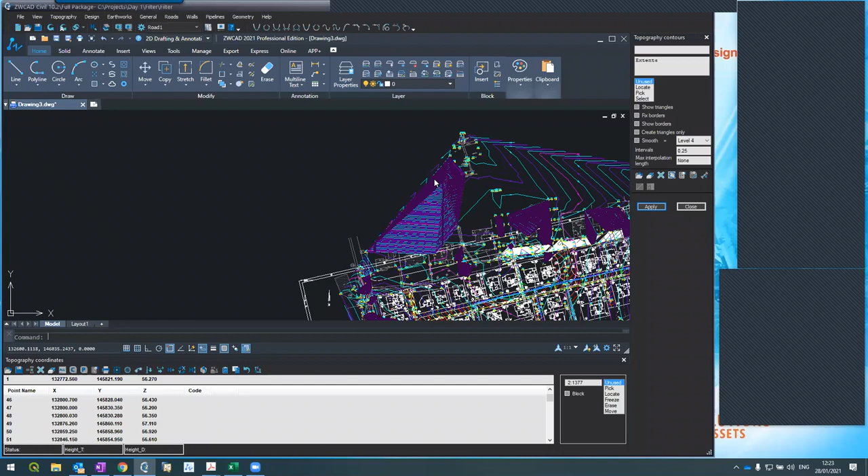There's a problem here, and here, and some here, and here. Many problems. And the question is why? Let's see this point, for example. Oh, I see the problem. The filter gave a result of zero elevation.

You know that in Civil CAD, if you remove the elevation, it's okay for the system - it ignores the point when you do surface. But when it's a zero, it's a different thing. We want to trace it. I'm using locate, selecting the point. Here it is, it's zero. See here, you can find it. See, it's zero.

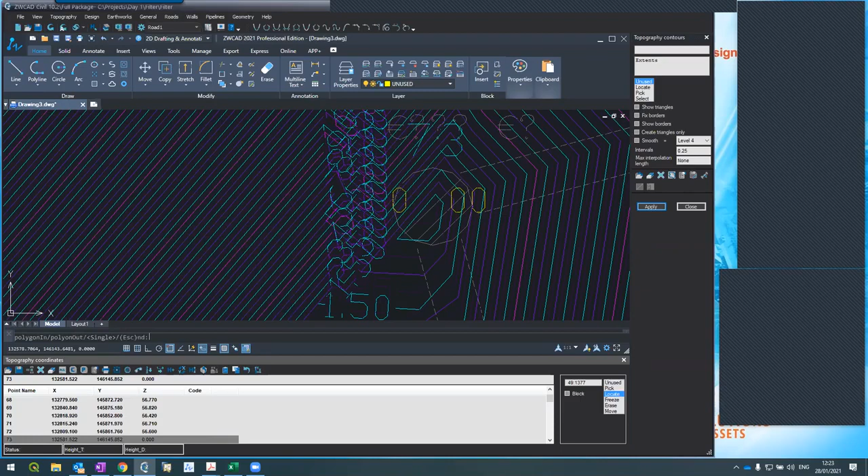Now I could go one by one and trace all these zeros, but I can do another thing. You see, there are many abnormals here. All these are zero.

But I have another option. I'm pressing find - you see this telescope, binoculars here? I'm pressing it, it says find, and it asks me what to find. I said find all the points that have a height which is at most, let's say, 3 meters.

Now we see that the average elevation here is about 54 - you see it, 54, 54, 54. So I want to find all the points that have an elevation below 5 meters, at most 5 meters. Find all.

Okay, system highlighted these. Let's scroll down - probably there are more, we know there are more. Oh, some we'll find here. Actually, the system highlighted all these points that have a zero elevation.

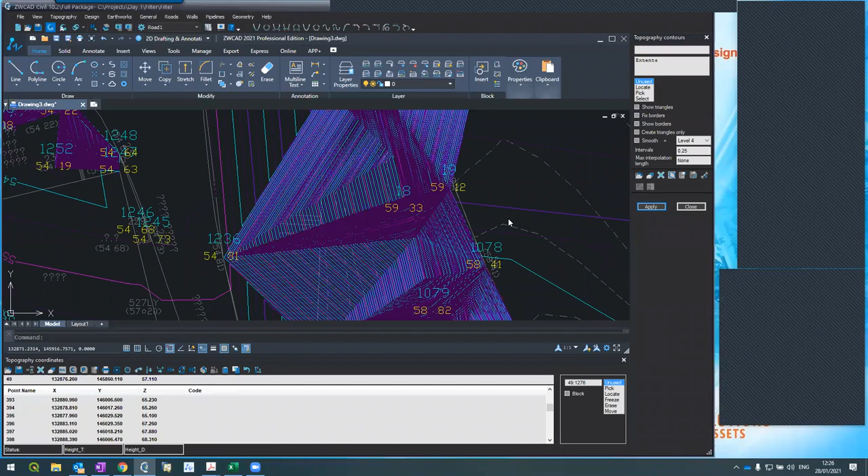I will refresh and recreate the contours. Let's see what happens now. Here it is - let's see the other place. Yeah, everything was cleaned on safe ground.